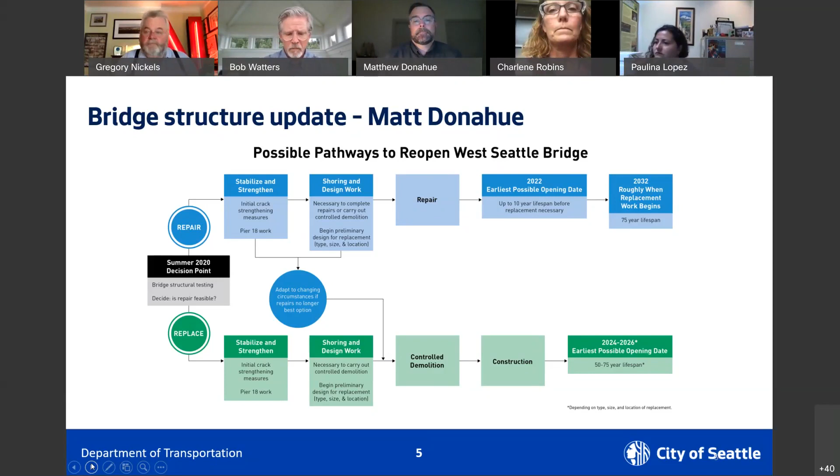And then just a few comments here on the left. If we were to go the repair route, we're trying to be mindful of that possibility and implementing these stabilization or crack arrest measures so that if we went the repair route, largely the repair would just be an expansion of those stabilization measures. So we tried to design it in such a way that we could expand on it and use it, and we wouldn't have to rip it out and start over from scratch if we go the repair route. Concurrently, the stabilization measures will also assist if we were to go to the shoring and demolition route as part of a replacement scheme.

So we're trying to be really careful to be expeditious in stabilizing the bridge and stop it from continuing to crack, but we're also trying to do it in a way that we can use that same stabilization for other means, to expand it for long-term repair or to use it as part of a shoring and demolition scheme for replacement. Next slide, please.

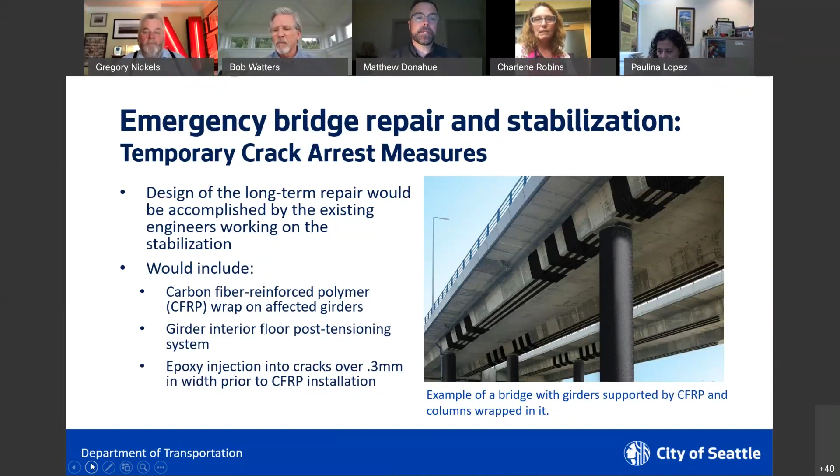Oh, and one thing to note on that previous slide, although you don't have to go back, is that if we do go from stabilization and went to the repair route, for continuity and expediency and cost savings, we intend to continue to work with WSP, because they would be expanding on their own design. You'll also recall last week that we talked about if we go the replacement route, or because we know we have to replace the bridge, whether it's in the near term or the long term, we're already procuring a consultant in a competitive process for replacement studies.

So just a little bit more detail on the stabilization work. The idea is there will be exterior post-tensioning strand. So it's outside the surface of the concrete, but it's actually in the girder, basically mounted to the top of the girder floor on the inside. And then also there's carbon fiber wrap that will be affixed to the outside of the girders. And to do that, we need to get up to the bridge.

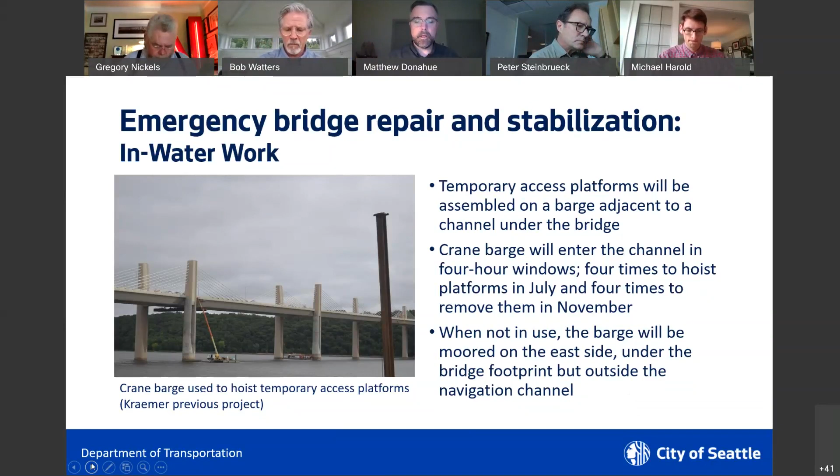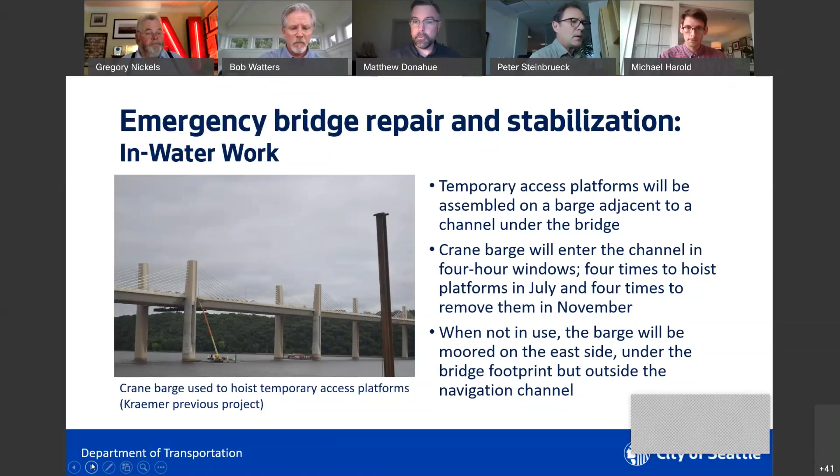And the quickest, safest, most cost-effective way to do that we determined was to basically take wire rope winches, put them up on the bridge deck, water blast holes through the deck so the wire ropes can be lowered down to a barge that will have these lifting platforms, and you basically just motor the barge in place, pick it up to the bottom of the bridge. It has travel rails on it so that it can move along the bridge, and then the barge gets tucked away to a safe location. And then we repeat that same process, lower it back down, put it on a barge, move it to the next location as we go through our stabilization work. Next slide, please.

So that's 4 platforms or 4 moves in total. As a reminder to our partners in commercial maritime community, there is a reduction of clearance by up to 7 feet. These platforms will be in place at different locations around the bridge, roughly from July through November. And we'll have many safety measures in place, including amber lights.

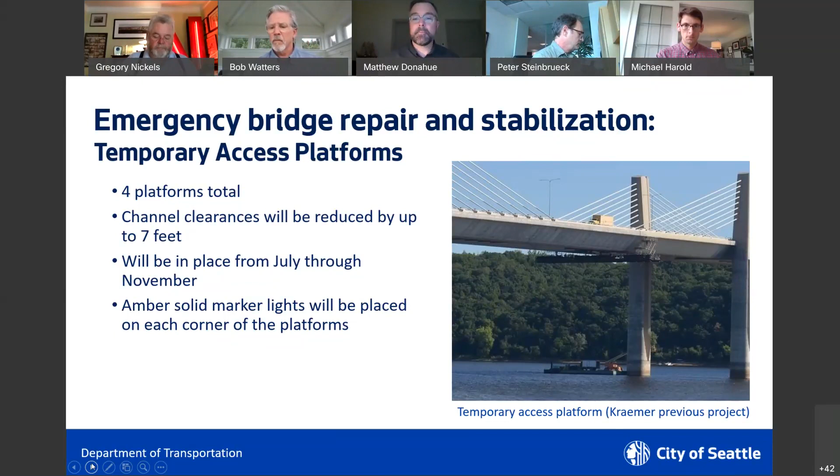And of course, there's close coordination between contractor Kraemer, who's working on the bridge, our bridge operators, and the Coast Guard to provide sufficient notice and coordination and communication during these operations to make it as seamless as possible and to lessen the impact to the commercial maritime community as we do our stabilization operation. Next slide.

So just a little bit of a recap. We'll, of course, have many BMPs in place on site, including containing any debris that might be introduced into the waterway. With the size of the barge, it's possible that you could do the movements with one tug, but we feel it's safer to do it with two, just because of the tight space that we're trying to work in, despite the size of the barge. Everybody will be on channel 13, which is fairly normal for this type of operation.

And as I mentioned, we'll have good communication between Kraemer, the SDOT team overall, myself in particular as the bridge manager for the city, and our bridge operators for the Spokane Street Swing Bridge, as well as the Coast Guard. And we've already, I think, begun to work with the Coast Guard on issuing an LNM.

And Kraemer is also part of our partner communication, if you will, as is normal for a contractor that has taken possession and is working on a site. They're trying to coordinate with any of the adjacent activities, including other construction sites. For instance, there's a construction site near the swing bridge with SPU, and they've already been coordinating with them.

Next slide. Matt, could you tell us what a BMP is and what an LNM is? Oh, sorry. A BMP is best management practice. So they're typically stipulations that come with a permit that say, you know, these are the things, the measures we want you to have in place for safety and for other operational reasons.

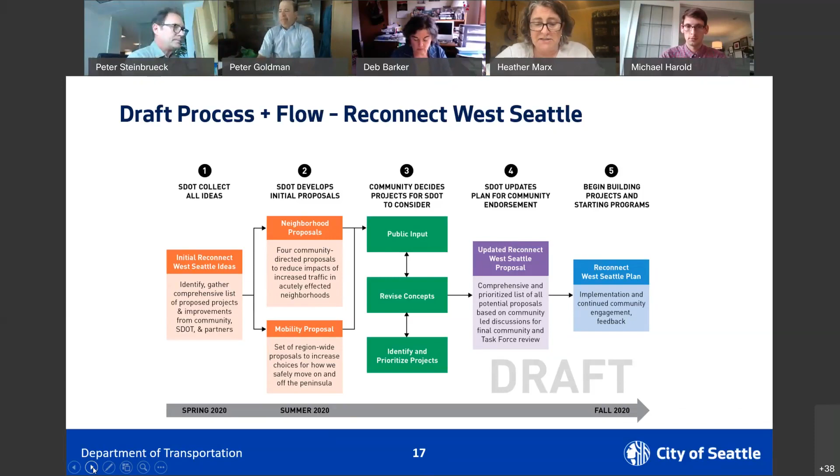We also sent you the Reconnect West Seattle Mobility two-page action plan, the freight improvement projects map and list, and the bike improvement projects map and list. I just want to note that transit needs to be an important part of what SDOT and Metro bring to bear in order to encourage transit use, while understanding, and I'll say this again, that there are some significant limitations to transit during a global pandemic. If we could move to the next slide, please.

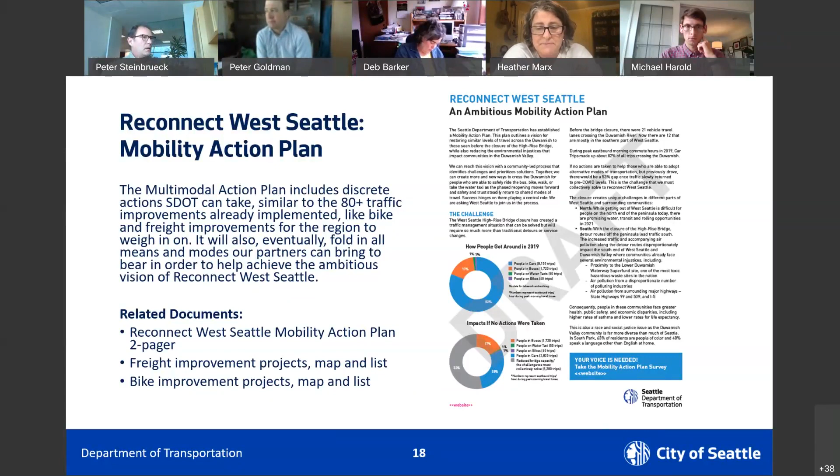So in addition, we have developed some neighborhood traffic mitigation plans. These frameworks enable the neighborhoods that are most acutely impacted by the detour routes to lead and prioritize the projects that they believe will make the most difference in mitigating those impacts. So the documents that we sent to you include a flyer, a map, and a list for South Park, Georgetown, SODO, and then one document for Roxhill, Highland Park, Riverview, and South Delridge. Next slide, please.

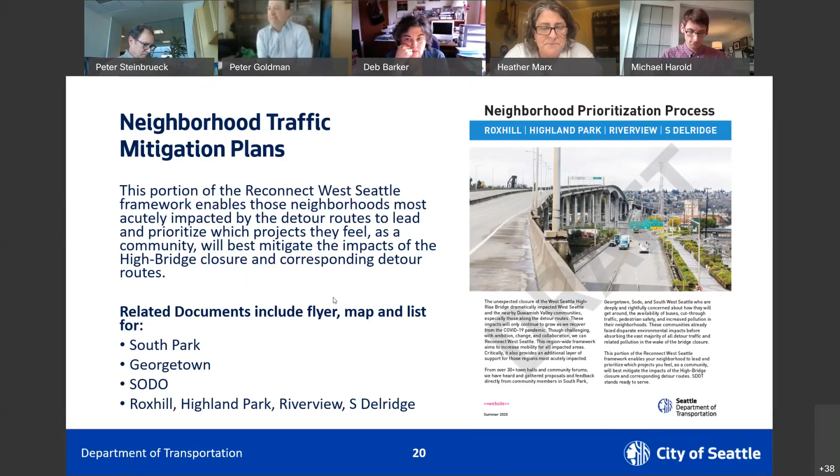So the process that we're going to go through is that the community is going to lead this process with city support. We really do not want the city to be in there influencing where each community feels they want to go. We're there for translation and technology and support.

We're working with our partners at the Department of Neighborhoods to reach out to groups that have not traditionally been part of the conversation. We are working with trusted community advocates to reach those community members. We want to make sure that people who aren't affiliated with organized groups still have an opportunity to provide input. This means you don't have to be a member of the Highland Park Action Committee to comment on the Roxhill, South Delridge, Highland Park, and Riverview plan. We also want to be transparent about the limitations, expectations, and criteria.

The reality that I'm sure all of you are following is that the global pandemic has had a significant impact on revenue that comes to local governments, including the city and the county. And so we will not be able to do all the things that we wish we could do. However, we want to make every attempt to do the things that are the most important for the community. Next slide, please.

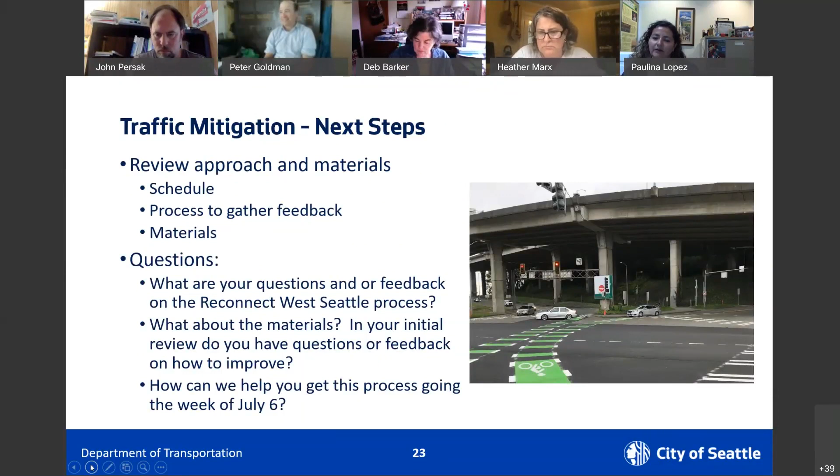So with that, I'm going to turn it back over to our co-chairs to take us into the next portion of our conversation. So Paulina, please. Thank you, everyone. Once again, I am really grateful for all your questions. This is why we have a community task force, so appreciated all the interactions through the chat box and answering the questions right away. So we're going to move forward. Last week, we weren't able to get deep into the low bridge access policy, and I know there's already some questions that are being addressed at the beginning. So we're going to be hearing from Adiam Emery on expanding access to the low bridge, as well as the city traffic.

What are they doing as the mitigation or prioritization, as well as emergency response, etc. So I also want to encourage you to use the chat box, or to bring up all the reflections or concerns that you have.

Great. Thank you, Paulina, and thank you for having me back. So I understand the access to Lower Spokane Bridge has been something that's been talked about and evaluated on a continuous basis. And I'm happy to come here and announce that there is some capacity that we're building, and I'd also walk through the difficult aspect of where this bridge sits and the traffic pattern and others that we see.

So the Lower Spokane is nested around robust port facilities that we have. We have a maritime industry around it. It's the closest crossing point to the northern peninsula of West Seattle. It's our only swing bridge, which takes a little bit longer than other bascule bridges to open, an average of 10 to 20 minutes. So we need to build in recovery time for the traffic platoon that we generate as we open the bridge.

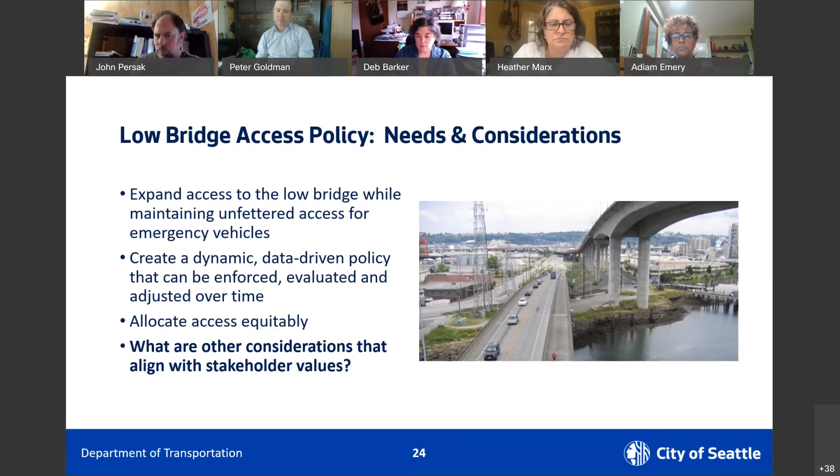Regionally, we are seeing a reduction in traffic volume. This is the trend that we've been seeing within the city network. But this doesn't equate to the Lower Spokane Bridge. This is just a reminder that as traffic returns, the lower bridge cannot be a solution to address all the traffic demand that is growing in this area, whether it's our future expected or what we're seeing right now. We're seeing a lot of volume using this. So enforcement is critical to sustain the integrity of emergency responder vehicles needing to respond at a faster pace.

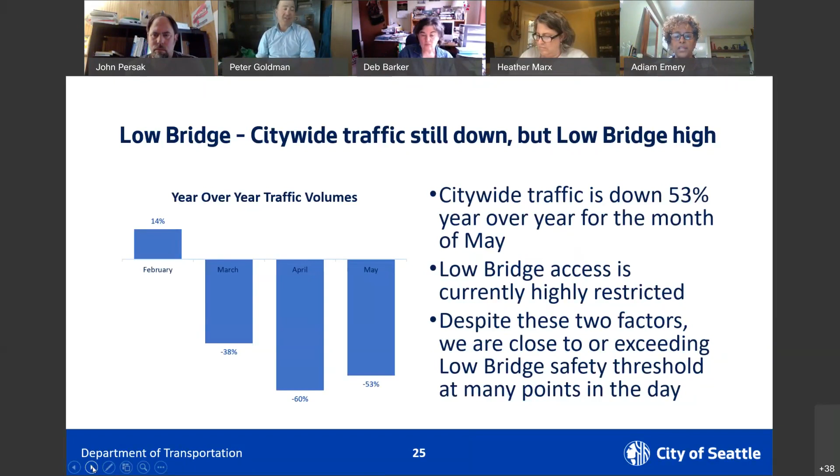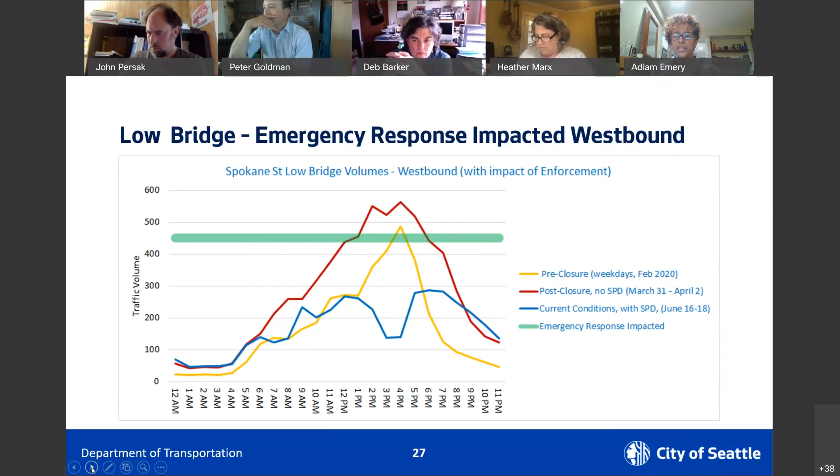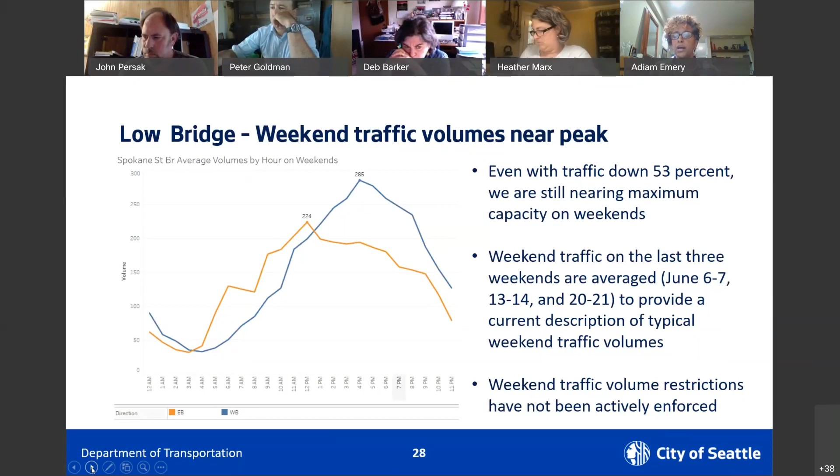But the good thing is, like I stated, we want to be data driven. We want to continue to analyze. We want to continue to shift. We want to continue to take what we're learning from the data in tweaking the policy objective as well. Next slide, please.

So the analysis summary, here's the takeaway. We have the 5-legged approach on the west side of the bridge. The Chelan 5-way intersection is a key limiting factor to adding additional volume here, not to mention that we narrow the bridge down to 1 lane at one point. As I stated, the green line that I indicated on the initial maps, the total of 400 to 500 vehicles per hour in each direction is the max cap.

And taking our current and future assumption of the use of freight, transit, and emergency responder vehicles, we believe we can allow an additional 160 vehicles per hour to use the bridge in each direction when restrictions are fully enforced. As I stated, I'm going to reiterate, this is going to be a moving target as we allow other vehicle types through and continue to evaluate the condition and the policy, and identify things that are actually contributing to the lack of a reliable operational network here.